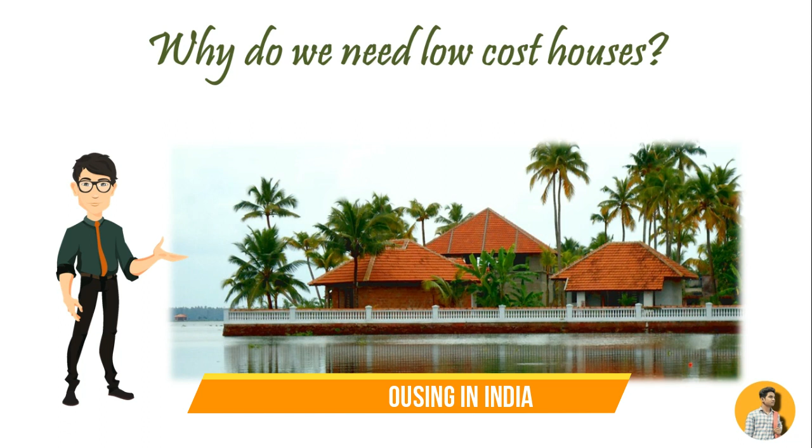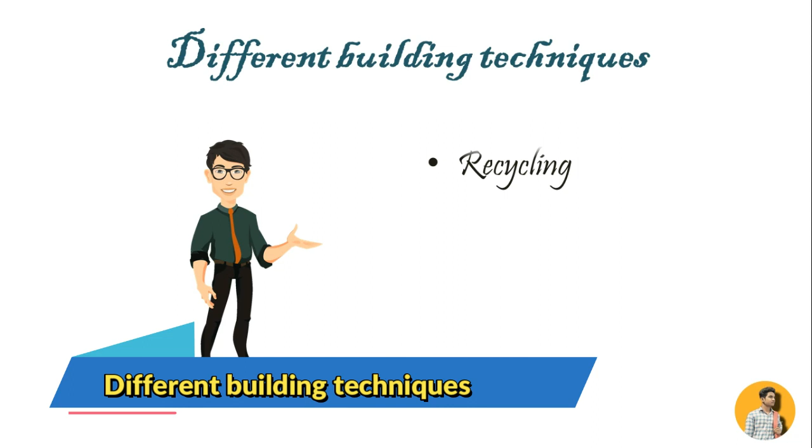Why do we need low-cost houses? The answer is, we need a solution that is fast and easy to build and fulfills the need of conventional houses. Our country aims that in the near future each and every individual has shelter for his family, and to fulfill the needs, we definitely need some immediate plans. What do we need? Low-cost housing. For that, there are different building techniques like recycling, extensive planning, modular planning, and infilling.

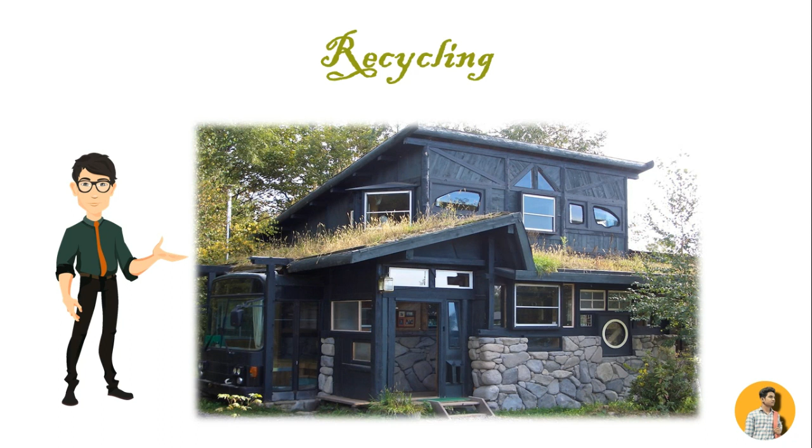Let's first talk about recycling. Recycled materials adopted for low-cost housing include wood and rubber that have previously been used. These materials are used in building walls and other parts of the house. Recycled glass and metals are also used on occasion. These recycled materials are often less expensive than natural products, usually free.

Extensive planning. This is most important before constructing low-cost housing. The more planning goes into a house, the less the actual construction will cost. Contractors should plan out exact dimensions and should gather facts. Contractors should look for the base material at the cheapest price so they can order exactly what they will need. This saves money that would otherwise be wasted on unnecessary supplies and cleanup caused by littered materials. Most houses are built as quickly as possible without this detailed planning beforehand.

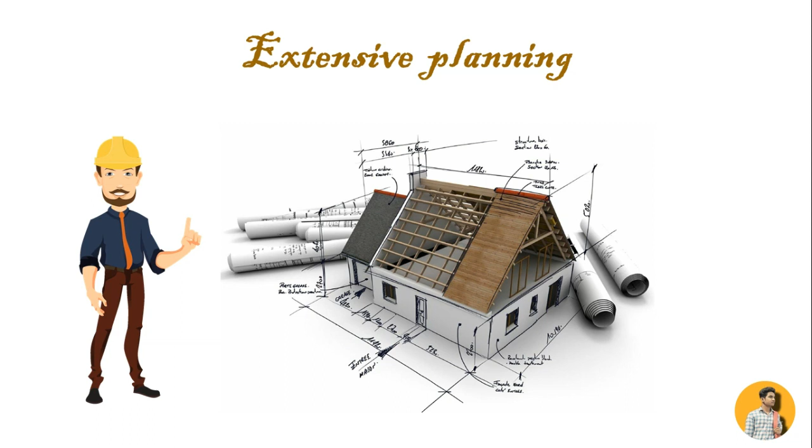Next is modular planning. It is a type of construction where pieces of a home, typically whole rooms or major parts of rooms, are built off site in large factories. This process allows the pieces to be built effectively and exactly; at the building site the pieces are connected to the house.

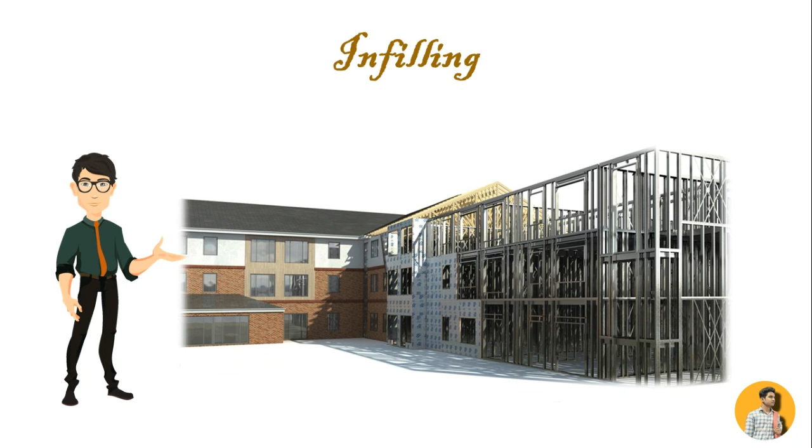One of the most important is infilling. Infilling is the practice of going back through the residential area and building in areas that had previously been left empty. Now it's possible to build on them because of resolved environmental concerns, space issues and other problems that have since been remedied. Infilling makes better use of existing spaces. It is less expensive for contractors overall.

Then let's talk about some techniques to reduce cost. Reduce plinth area by using the thinner wall concept. Use locally available materials in innovative forms, like soil cement blocks in place of burnt brick. Use environmentally friendly materials which substitute conventional building components, like the use of RCC door and window frames in place of wooden frames.

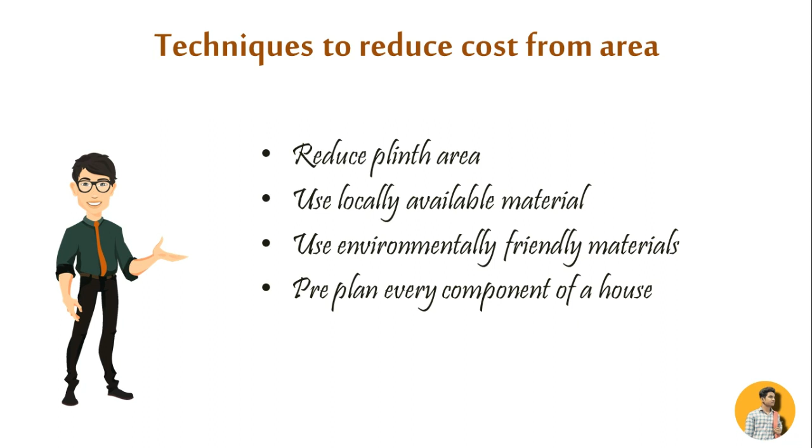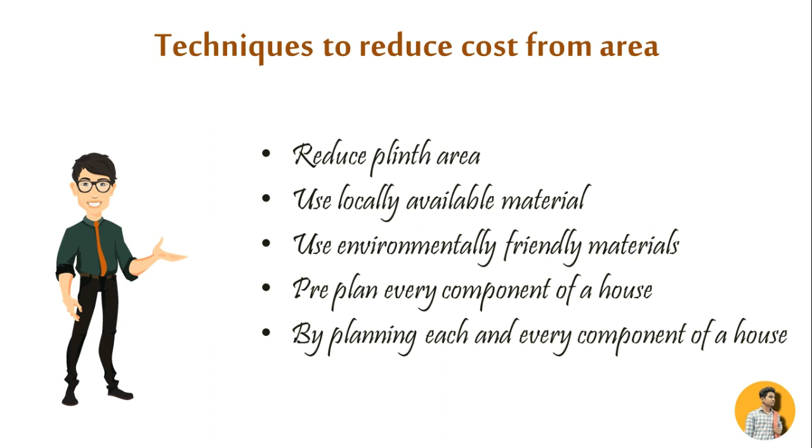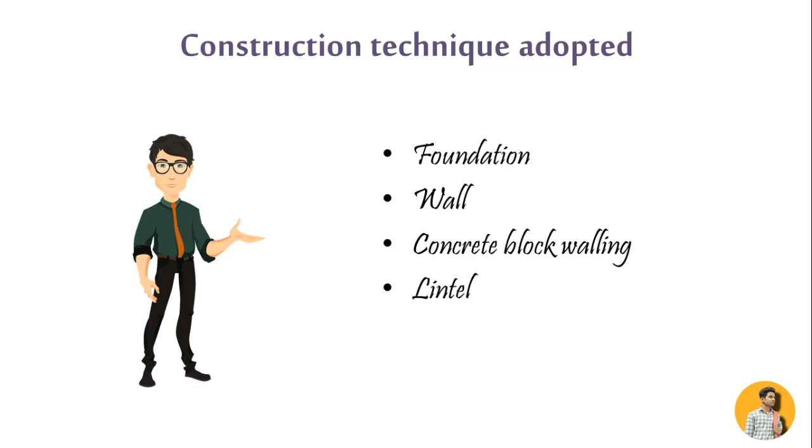Pre-plan every component of a house and rationalize the design procedure for reducing the size of components in the building. By planning each and every component of a house, the wastage of material due to demolition of unplanned components of the house can be avoided. Construction techniques adopted are foundation, wall, concrete block walling, lintel, and roof. First is foundation.

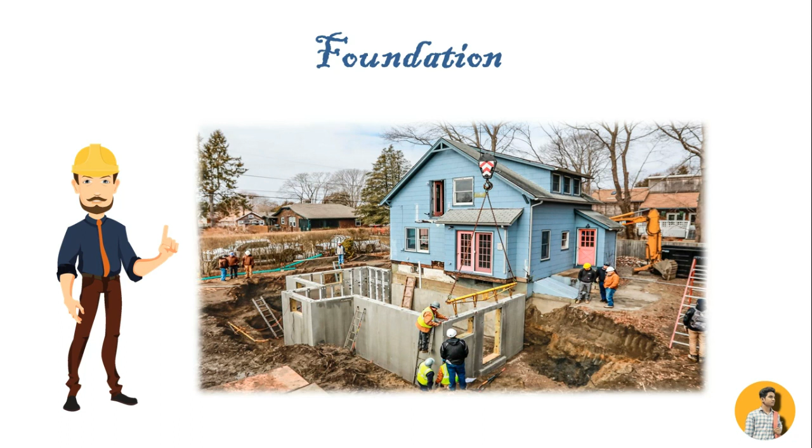The foundation cost comes to about 10 to 15% of the total building. It is suggested to adopt arch foundation in ordinary soil for effecting reduction in construction cost up to 40%. In the case of black cotton and other soft soils, it is recommended to use under-reamed pile foundation, which saves about 20 to 25% in cost over the conventional method of construction.

Second is wall. Making use of rat-trap bond wall and concrete block wall. It is cavity wall construction and leads to reduction in the quantity of bricks required for masonry work. By adopting this method of bonding of brick masonry compared to traditional English or Flemish bond masonry, it is possible to reduce the material cost of brick by 25% and about 10 to 15% in the masonry cost.

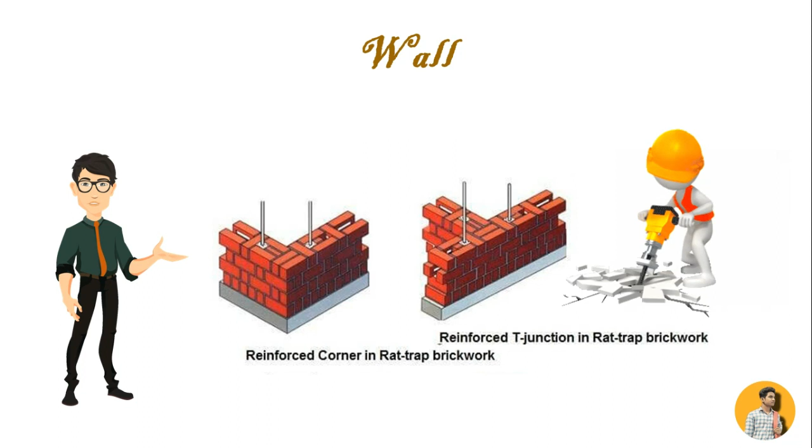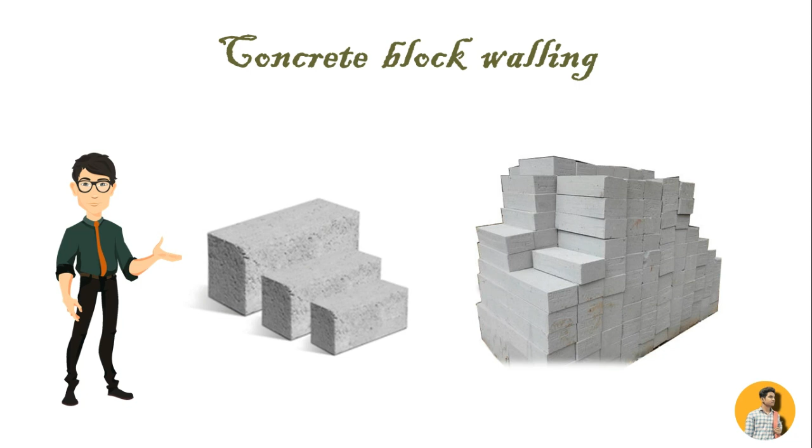Third is concrete block walling. In view of the high energy consumption by burnt bricks, it is suggested to use concrete blocks, which consume only about 1/3 of the energy of burnt brick in production. By using concrete block masonry, the wall thickness can be reduced from 20 cm to 15 cm. Concrete block masonry saves mortar consumption and speeds construction of walls, resulting in higher output of labor. Plastering can be avoided, thereby an overall saving of 10 to 25% can be achieved.

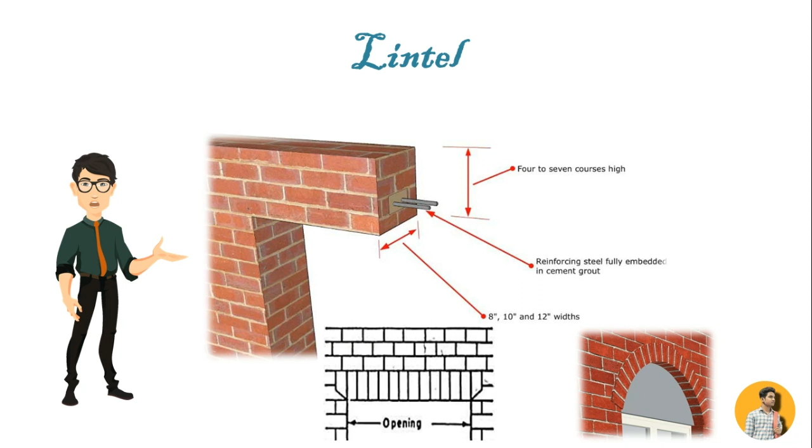Fourth is lintel. The traditional RCC lintel, which is costly, can be replaced by brick arches for small spans and save construction cost up to 30 to 40% over the traditional method of construction. By adopting arches of different shapes, a good, architecturally pleasing appearance can be given to the external wall surface of the brick masonry.

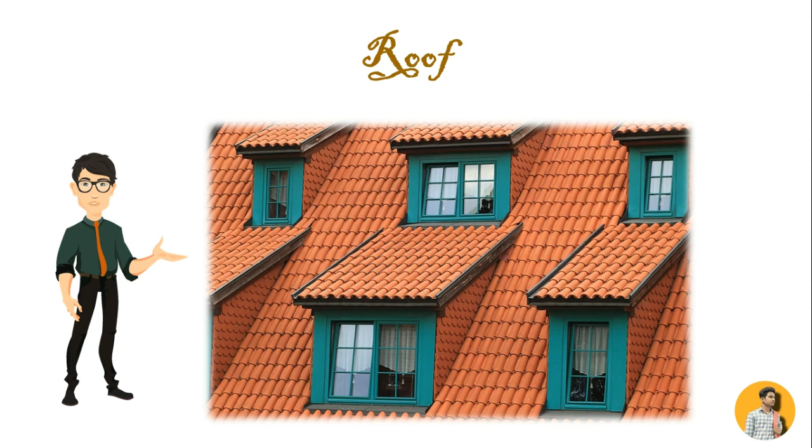Fifth is roof. By adopting rationally designed construction practices like filler slab and precast elements, the construction cost of roofing can be reduced by about 20 to 25%. Filler slabs are normally RCC slabs whose bottom half concrete portion is replaced by filler materials such as bricks, tiles, cellular concrete blocks, etc. These filler materials are placed so as not to take structural strain, replacing unwanted tension concrete, thus resulting in economy. These are safe, sound and provide an aesthetically pleasing patterned ceiling with no need to plaster.

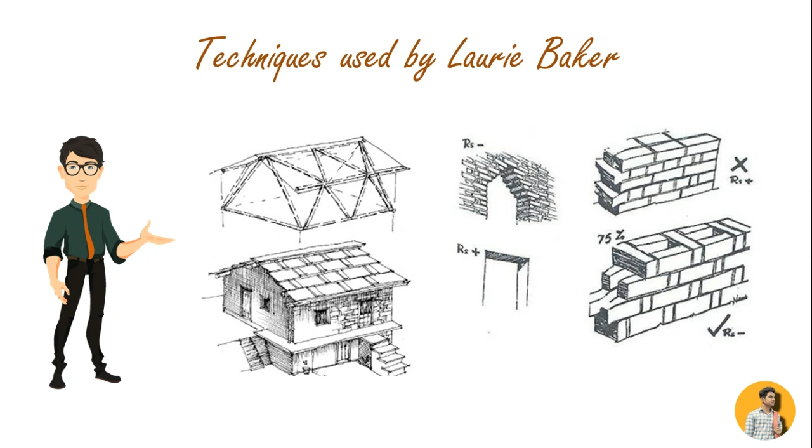The most famous architect is Laurie Baker. Laurie Baker was an award-winning British-born Indian architect, renowned for his initiatives in cost-effective, energy-efficient architecture, and made many concepts related to low-cost housing. In Laurie Baker's approach, all materials are used in their natural forms. Exposed brickwork, mortar and concrete show the truthfulness of materials. Baker loved materials in their natural form, made use of brick jalis, an effective way to minimize the electricity bill, and recycled wood from demolished traditional buildings. These are all about Laurie Baker's concept and low-cost housing.

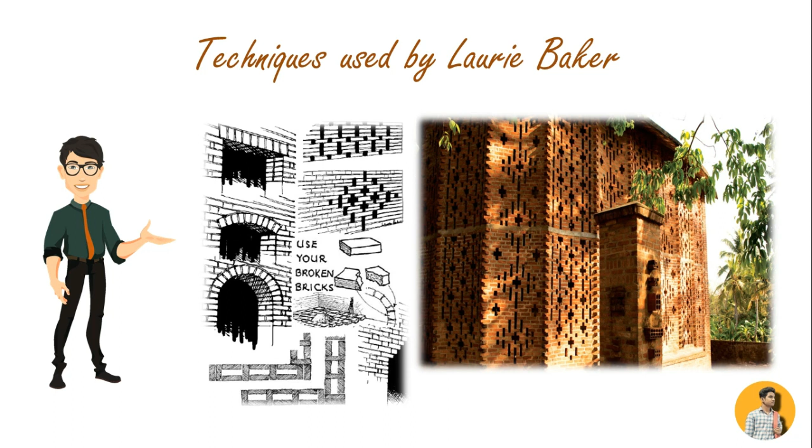With the help of Laurie Baker's concept, we can build the cheap and affordable houses we need at present in India. It is key to a nation's development to provide shelter to its citizens. The growing population in urban areas has led to a strict shortage of land, congested traffic and housing shortfall. This has also led to a hike in prices, which makes it impossible for common people to have their own houses. Thus there is an immediate need for construction of cheap houses on a large scale.